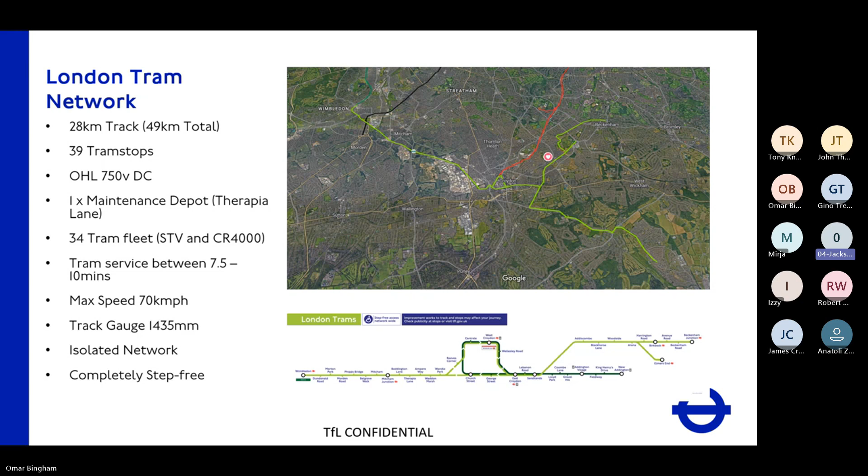And it's completely step-free, something that we're proud of as well, to allow all customers from all different types of physical capabilities to access our trams. We've got low loading floors, and we maintain a good platform clearance for all customers.

Talk a bit about track forms: embedded track, concrete slab, the little of it we do have. So when it comes to embedded track, we have what we call the on-street sections. So this is where part of the track is shared with the highway users, road users, and pedestrians. As you can see, it's an open environment. Anyone can access it, do what they like.

And believe me, we get some scary stories from time to time, but it's the nature of the business that we're in and the environment. That's the whole purpose of trams. It connects little towns, cities, takes people to hospitals and closer to the destination, essentially. So we have on-street track.

We also have segregated track where we don't have the highway entering. So this is kind of a different environment, but we still have pedestrians, as you can see in the photo, wandering, doing what they like, dropping bits of debris, people's vapes in the grooves, and all kinds of stuff. Chicken bones, we've had earphones, fidget spinners, nuts, bolts. This is the environment that we have to work with.

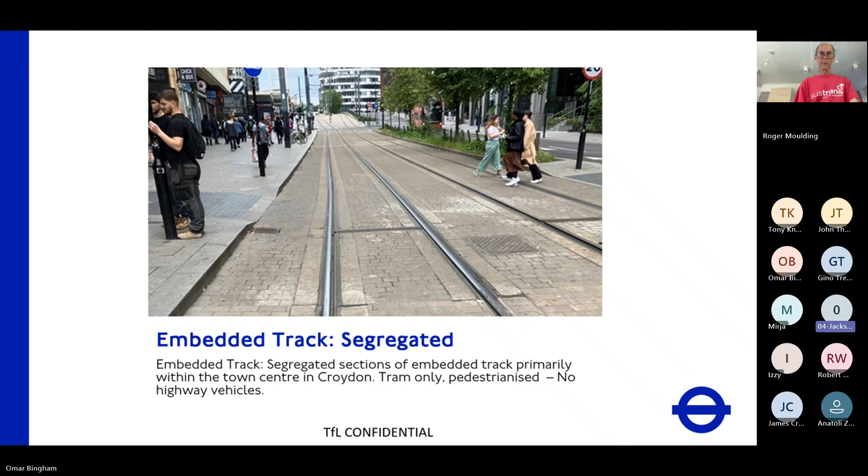We have a very, very small section of concrete slab track. I have to give this some mention. This is at Wimbledon. The purpose of this slab was to raise the track bed to the platform height to get into Wimbledon Station, because the platform to the right is for National Rail, and they've got 750 and 930 platforms there. Ours is slightly shallower. So yeah, that's a small mention of slab track.

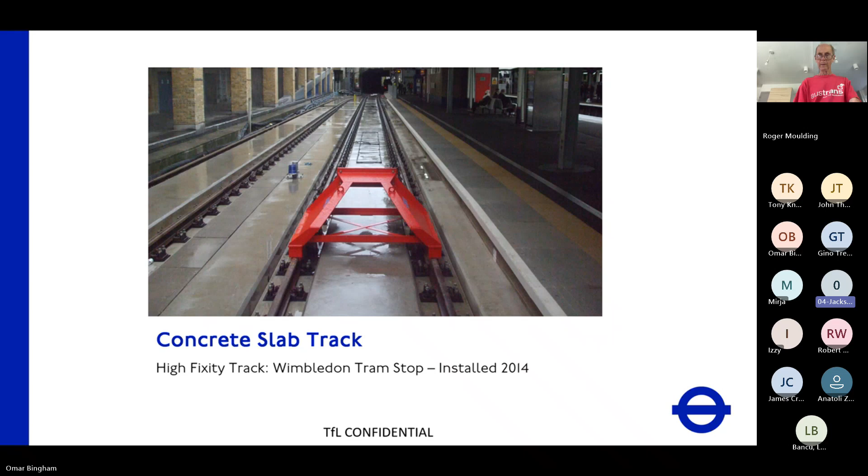Road crossings is another track form that we have. It's slightly different to the embedded in terms of the material that we use to construct it. The slab is slightly different. And so this one is constructed with a flat plate against the flat bottom rail. I'll say a bit about that.

It's not a level crossing, although I tend to say that from time to time. It's a road crossing. It's controlled by traffic signals. Cars stop at red, they go on green. It's as simple as that. It's a line of sight type of network, so it relies heavily on drivers' visibility and them acting and protecting the customers as they see fit.

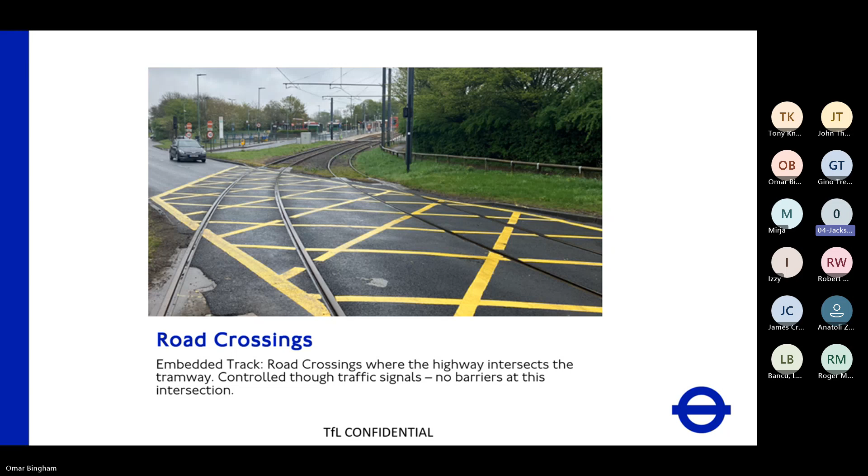We have ballasted track, and again, another misconception is that we have little ballasted track, but in fact, 80% of the network is ballasted track, featuring a mixture of different components, and it's conventional, just like National Rail. We've got wood, composite and concrete, different types of bearers, angular granite ballast, so nothing too different to what you have on your networks.

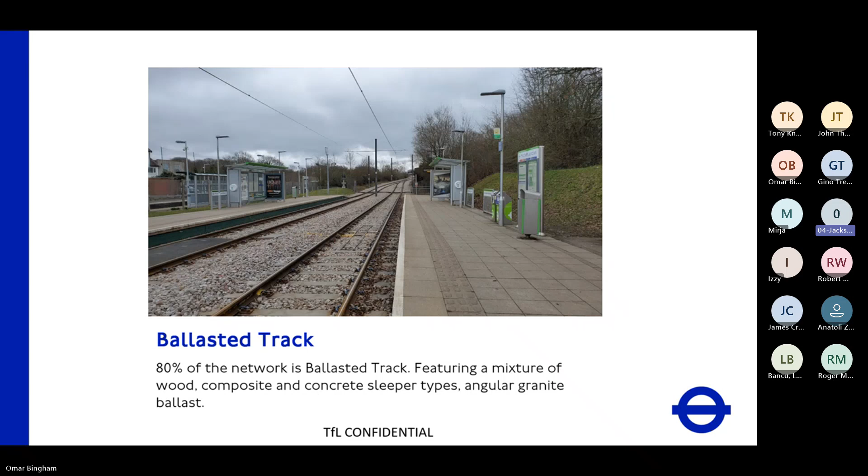I'm going to talk about some tramway features, some of the stuff that makes the tramways quite unique. Interlaced track: this is in between Beddington Lane and Mitcham, where we have a single line occupying the two tracks and one envelope, essentially. I think this was done purely to prolong the life of the single line section. So what we have at either end of that interlaced track is two crossings. That was for one tram to travel on one rail, one tram to travel on another rail.

We're going to be replacing this asset in October. So we are keeping the interlace, but we're making the crossing a little bit wider to allow for maintenance. We're changing it from a 1 in 7 to a 1 in 8 crossing, widening the gap between the two rails so we can get things like welding apparatus on there or fish plates if we need to clamp.

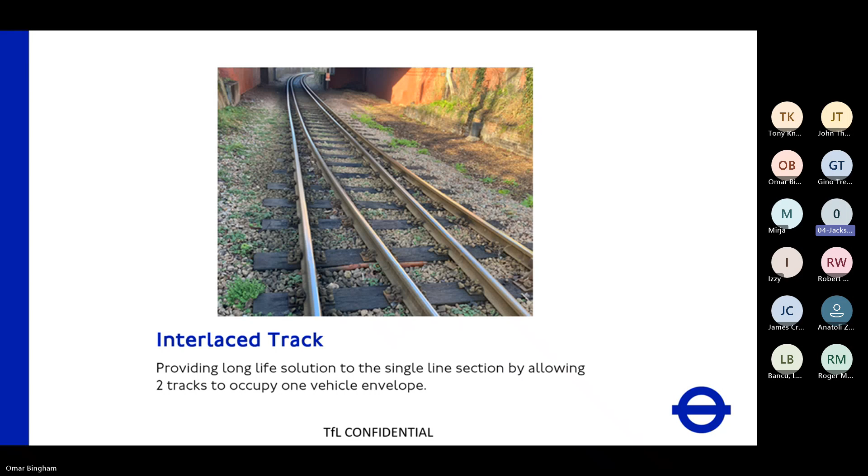We have very tight radius curves. We've got many of these in the town centre in particular, 25-metre radius curves. These are laid, some of them with adverse cant, because we've got to follow the camber of the road. So we experience very high rates of wear here. There's pretty much nothing we can do here. This is inherent. We have to live with it and adapt our maintenance regimes to suit the aggressive wear that we get in this pattern.

The trams navigate these curves quite well. Actually, they can navigate curves up to 18-metre radius curves. They've got very small wheels. They've got independent bogies. And so it's nothing for them to traverse these curves. In the ballasted section, we have up to 30-metre radius, so not so bad.

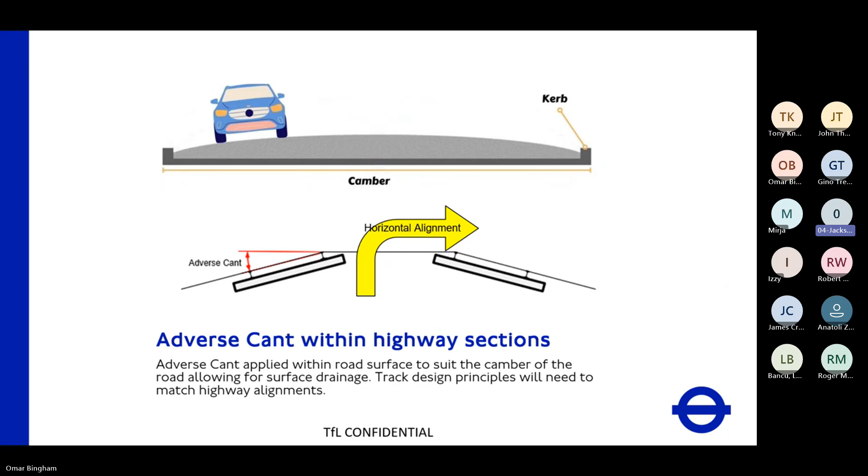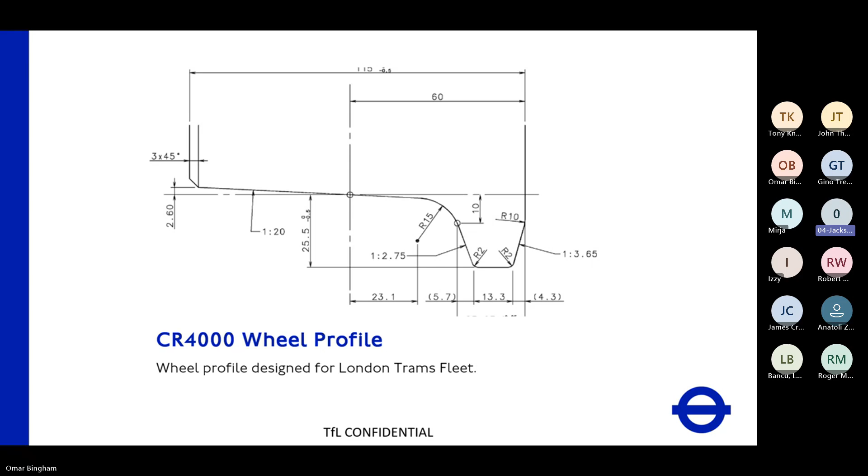We have a different wheel profile. So the wheels are designed for flange running, but we don't have that on the London Tram network, so we don't run on our flanges. But they are designed for that. These are tram wheels. They have a little bit of a longer flange to navigate some of those curves. And it's slightly different to the wheel profiles that you get, sort of a P8 or a P10 on mainline or underground.

We have a back-to-back gauge, which is incredibly tight. So we require vehicles to be at least 1380 back-to-back. That's slightly narrower than the main line because we've got flangeways of 29 mil. So if you go on the main line, your flangeways are 50 mil clearance. This is a huge problem for us for getting RRVs and machines onto track. We have to often take off the check rail or adapt the machine, which incurs quite a lot of cost on us.

Also, our check rails sit 21.5 mil above the running rail when it's new. That also presents challenges for RRVs that have road wheels. They often come into contact and strike the check rail. So it's one of the things and challenges that we have to deal with.

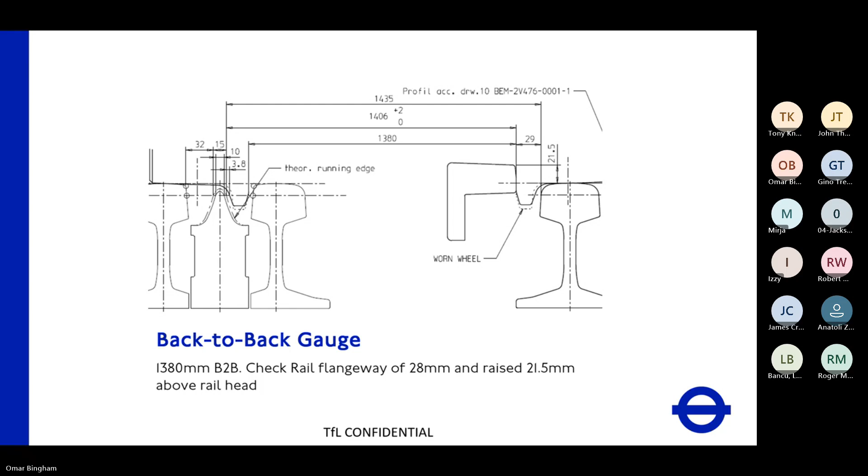A bit about components and our configuration, really. Grooved rail, I'm sure many of you are aware of it, but the profile that we predominantly use is RI59, although we have some 54 elements or some 60 elements in the network. Essentially, this rail was designed to be laid flat because its inclination is built into the head of the rail. So you wouldn't put it on a sleeper with an incline of 1 in 20. Most of the rail is grade 350.

What we're starting to do now in some of our curves, 25-metre radius, is increase that steel quality to 400 GHT, something that the Europeans have been doing. So we've been following suit to do that. So in particular, Barclays curve and at Reeves Corner, we've got 400 GHT through our curves. And they're also through our S&C elements. So the stock rails of the embedded points will have 400 steel built into it.

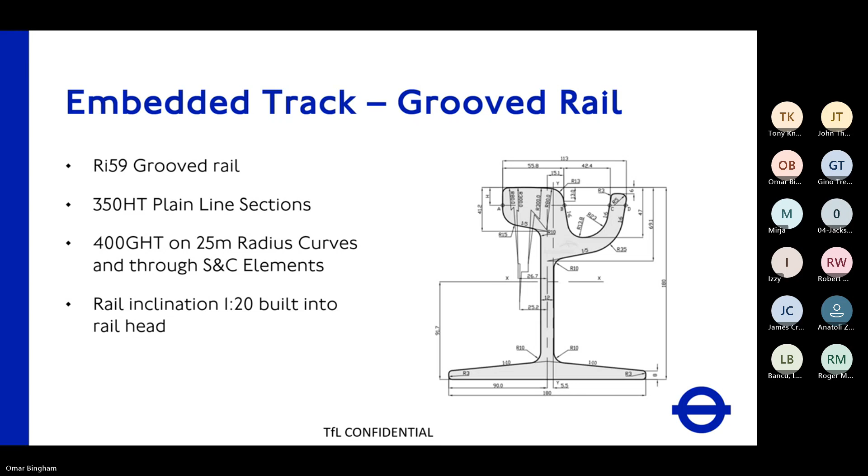This is a typical track bed construction for embedded track. So everything has a slab. It's laid in a nice concrete slab, and the rail sits in a concrete channel, to put it quite simply. Within that channel, we backfill it with a polymer to keep that lateral stability. The rail is gauged to 1435, and over the top of that, we put a wearing course of tarmac. This is how embedded track is laid to allow for the highway.

We allowed a 6 mil tolerance between top of the rail and the wearing course of the road, which often isn't kept because it's difficult to do that. But in any case, this is what we have.

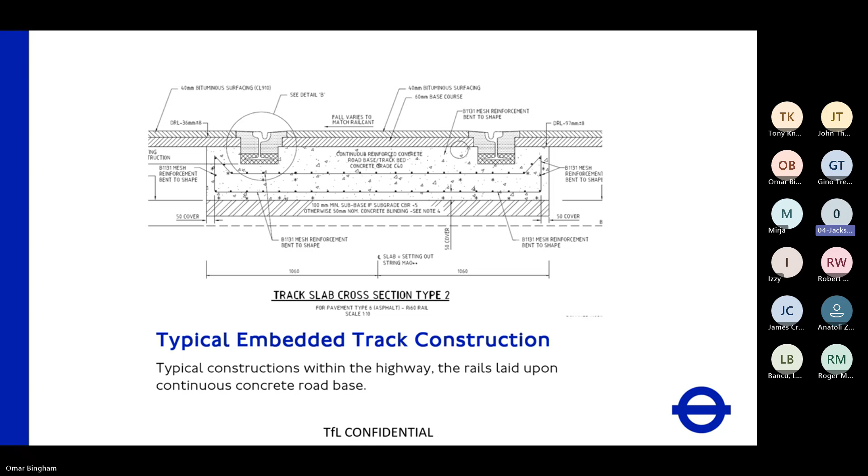For the road crossings, typically, which we're trying to design out, actually we are actually designing out of life now, this design of a flat bottom rail with a bolted keeper. So this flat plate that's bolted to the flat bottom rail. What made the issues here, which I'll talk about later, but essentially, as the road wears away and potholes are formed, we get loading onto the flat plate here, which then in turn breaks the bolts, or snaps the plate, and obstructions affect the flangeway between the rail and the keeper. We have this design in many of the road crossings, which we are phasing out through our renewals program.

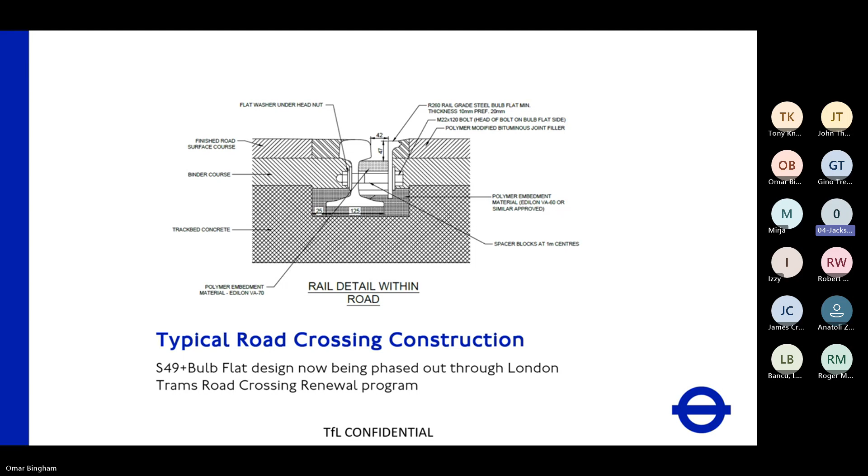Flat bottom rail, traditional, so it's a lot smaller than your 113 pound or your 1060s. We incline it at 1 in 20. It's a smaller, lighter rail. So if you're buying in bulk, if you're buying 30 tons at minimum, it's far cheaper to buy 30 tons of S49 than it would be to buy sort of 113 pound. The whole point of tramways is to keep it cheap, keep the cost down, and so that's what buys in communities really across the world into tramway systems. So we use components to suit that.

There's talk of changing this and going to 113, but I'm not quite there yet. I think there's still some benefit to using this, but because markets that make these components are overseas, and with our issues with Brexit, it's quite difficult to source these. They have very long lead times. However, we are where we are. This is S49 rail. It's got a smaller foot as well, 125.

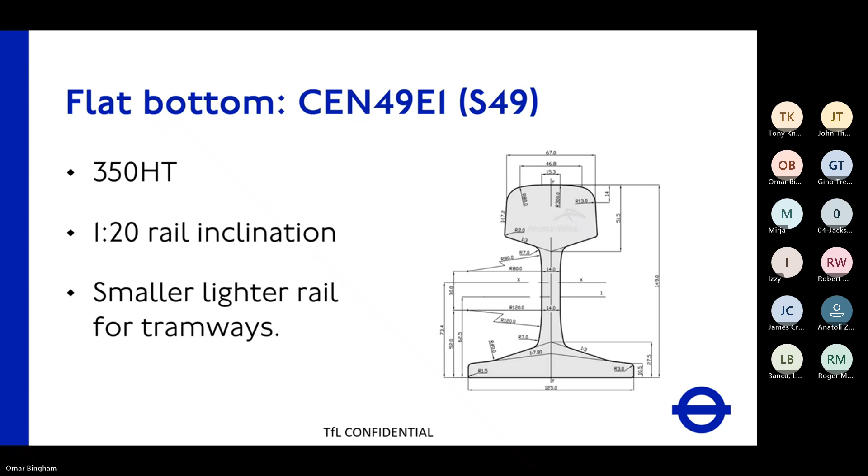Sleepers. So predominantly, we have concrete sleepers throughout the network. We inherited a tarmac T16 sleeper from the constructors of the original tramway system. And we're slowly trying to phase that out to put in, where we can, T-cup composite sleepers. We had some issues last year in Sandilands where we had some temperature variance with the gauge. So as the temperature heated up, we had the track gauge spreading. It wasn't much of an issue, it just wasn't in installation tolerance, but we're going to continue to use and adopt this so we can meet TfL's green strategy. And we find it to be a better sleeper than woods and easier to install than concrete.

Where we do have to install concrete, we are installing the NR1502 designed by Network Rail, and that comes with fast clips, which is a type of fastening that we're trying to move over to rather than the SKL, the screw, simply because it's easier to use, it's better. We do have wood bearers through our S&C layouts, pretty much most of them on the ballasted section, and we've got some long bearers as well within the platform to keep that alignment. It's one of the techniques that we use.

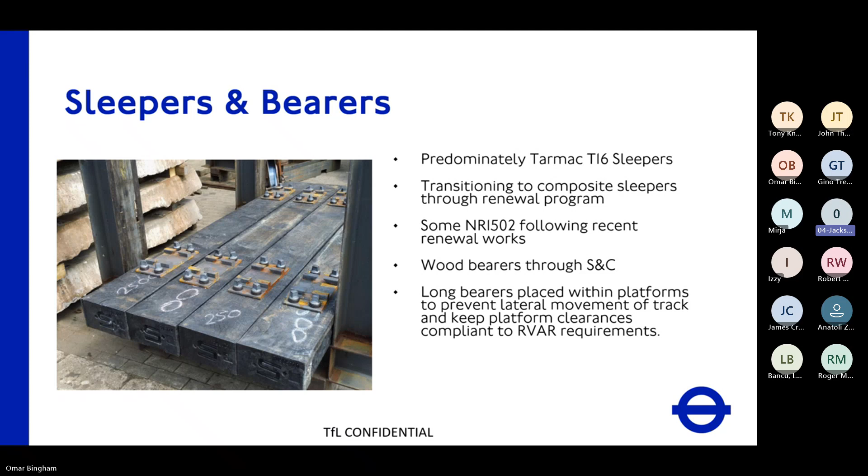Fastenings again, so we're trying to move away from this where we can, move into a fast clip solution. It's nice and easier to use and easier to manage. When you take these screws out and if debris gets in the hole and you over tighten it, you crack the sleeper. And we just find that the fast clip is better. But yeah, it's high toe load all the same.

S&C. So point mechanisms. Now, I'll be honest with you. It's not my area of expertise. I've inherited this as an asset. I've never had to do it before, but I'm learning slowly. I've got a training course later on this year to attend. All of them are manufactured by Hanning and Kahl, and they sit in the ground in a thing called an earth case. So it's in the track bed. It's maintained by the permanent way team, and it's basically got a motor in there, a couple of springs and levers that switches to whatever position. There's different variants as well, because we have motorized, hand swung, throw over types of point systems, but they pretty much all do this.

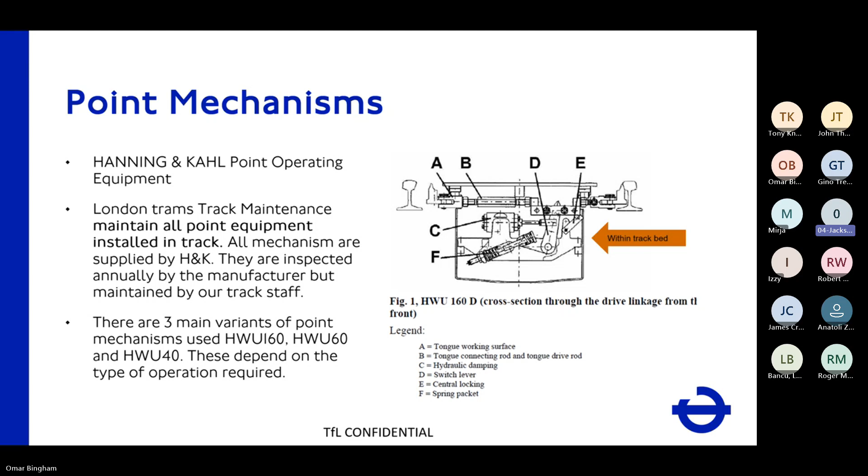Sprung points, again, another type of unique feature, I would say, to the tramway. It's a cheap, cost-effective way to have a set of points that allows you to operate it through different routes. So essentially, sprung points are designed to be pushed through. So we get flange back contact on our points. Some people might find that scary, but this is how these points are designed to be used. Essentially, they return to normal once you push through them.

It requires no inspection after that. And to aid in that movement of the switch, we install something called Roll, which is a dampening device that prevents the switch rail from slamming into the stock and damaging the componentry right there.

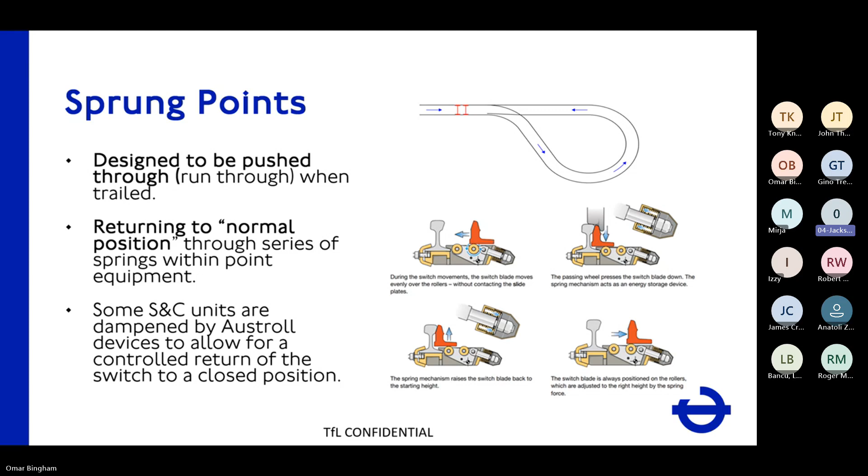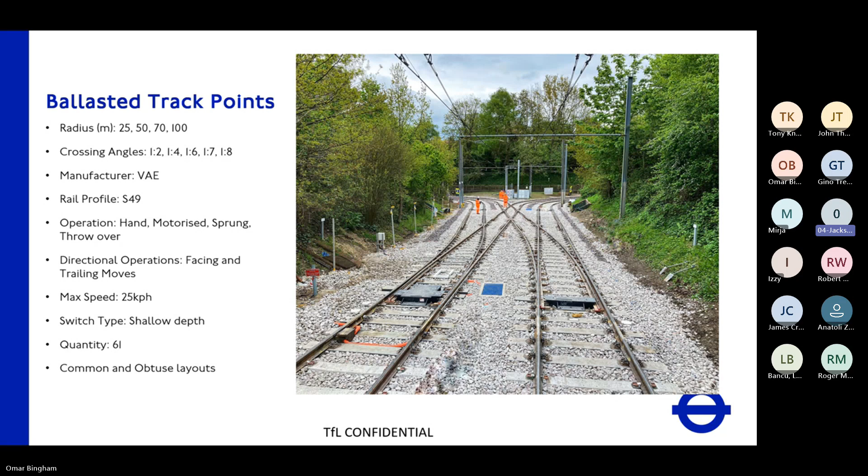Yeah, so S49 shallow depth switches. Again, our lead lengths are really short. This is a 7.8, 7 meters, 800. And we have something called an anti-creep device installed into our switches.

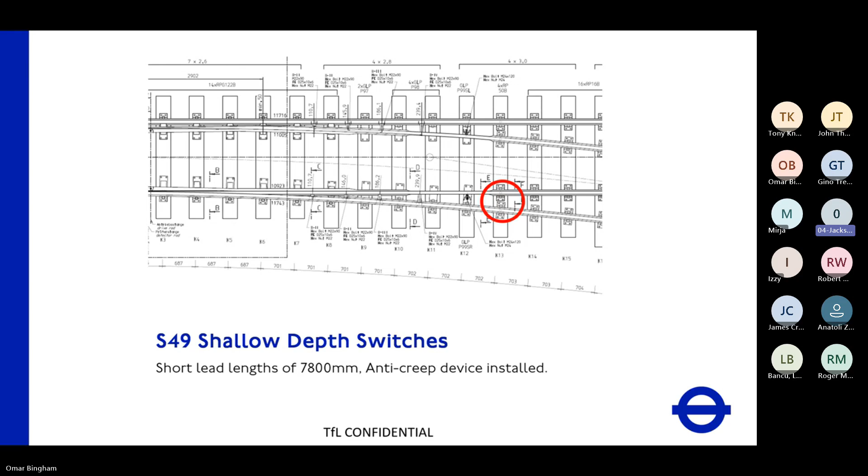So what is that? Basically 2 pins on a base plate, preventing the longitudinal movement. So in the foot of the rail, we drill 2 holes, put the stock rail down, put the first or the last clip secured on the switch, and that prevents that longitudinal movement. So that's how we manage stress in that area. Essentially, these are unstrengthened sets of switches.

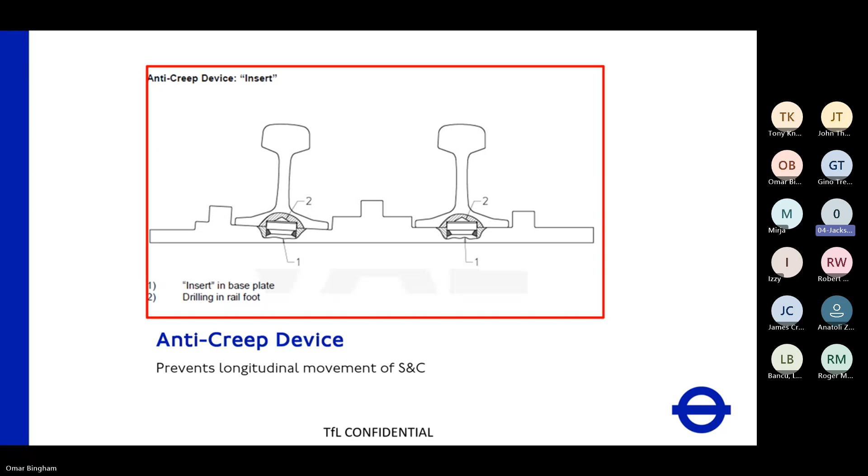Embedded, again, works very similar to the ballasted. We have an H&K, an inspection cabinet, go in there. Same with the motorized, although they're slightly larger, between 50 and 100 meter radius turnouts. The elements of it is 400, so the stock rails are 400, the switch is 350 to allow us to do some weld repairs in those locations. Again, it's a mixture of trailing and facing, and we've got about 15 sets of these.

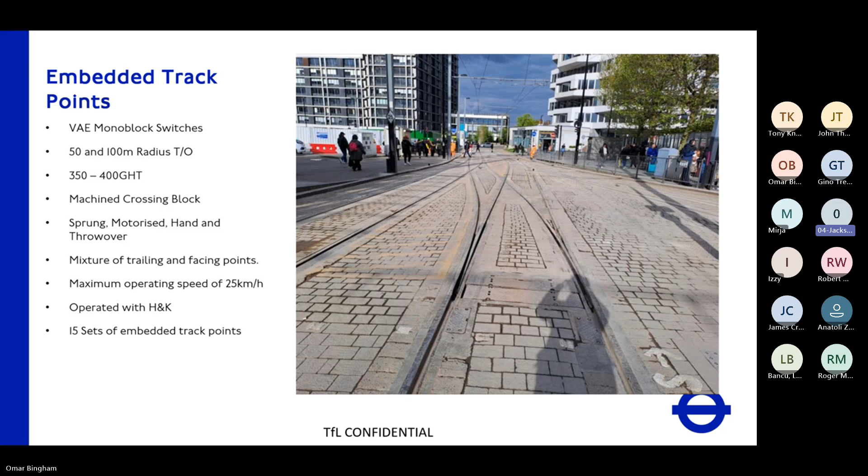The crossing block is made out of one solid block of steel. So when I went over to Germany, they had a massive block of steel. So it's not hollow as sort of ballasted crossings are. They just machine it, and that prevents it from snapping and breaking. You don't have crossings breaking. So it weighs about a ton. But this is what it looks like.

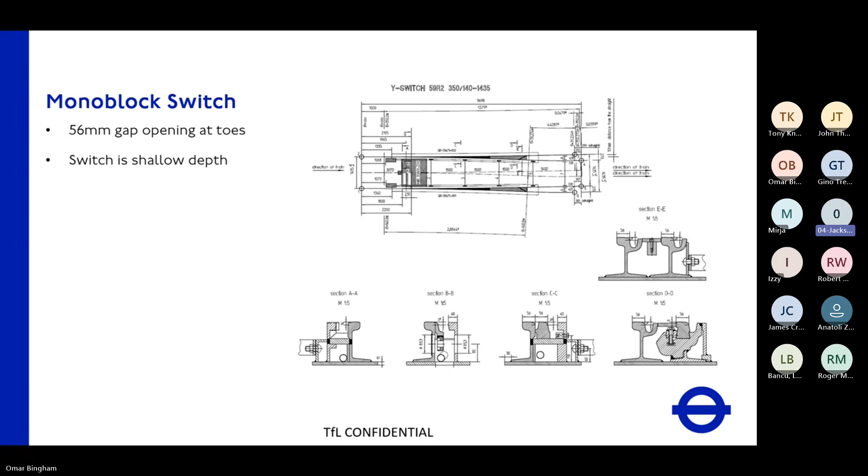So the switch rail itself, probably about 80 mil in depth. It sits on a plate, a flat plate, slides along that plate. They call it a monoblock switch, and I'll show you in the next picture because basically they weld this block onto a bit of rail, and you've got in your head like a picture of a swing nose crossing. It pretty much works like that. It's all shallow depth all the way through until it's welded at the other end.

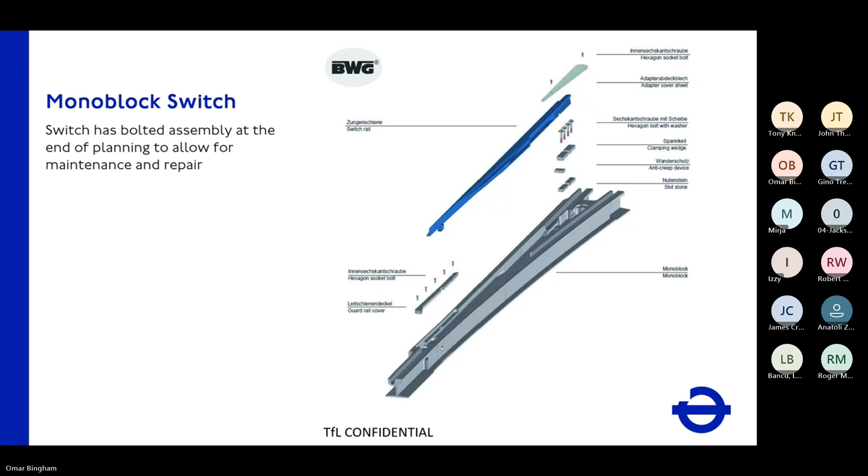Lubrication on the network, so we do have them. We just don't have them within the embedded sections because the grease takes the contaminants, and that's a whole other story, and a whole other presentation on that. Essentially, we have lubrication in our ballasted section, friction modifiers. We're using the very old LB Foster GDUs. It works for us. We've looked at other designs, newer designs in this century.

It's probably not going to work for us because of the size of our rail. This works fine, and we're happy with it at the moment, and the grease that we're using as well. I had this gauge designed as well by LB Foster. Asked them to produce a gauge for us, do a study on our wheel profiles, rail profiles, because previously our teams were going out and adjusting this manually. So now we have a gauge, and hopefully that can help with the number of noise complaints we have on the network.

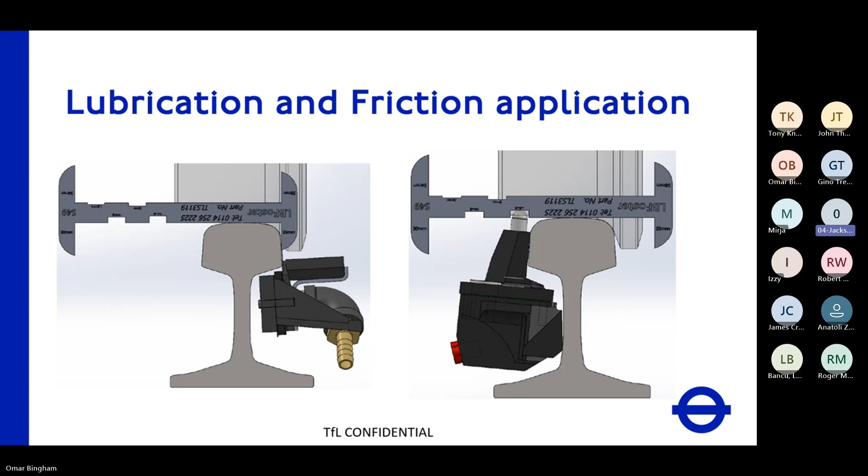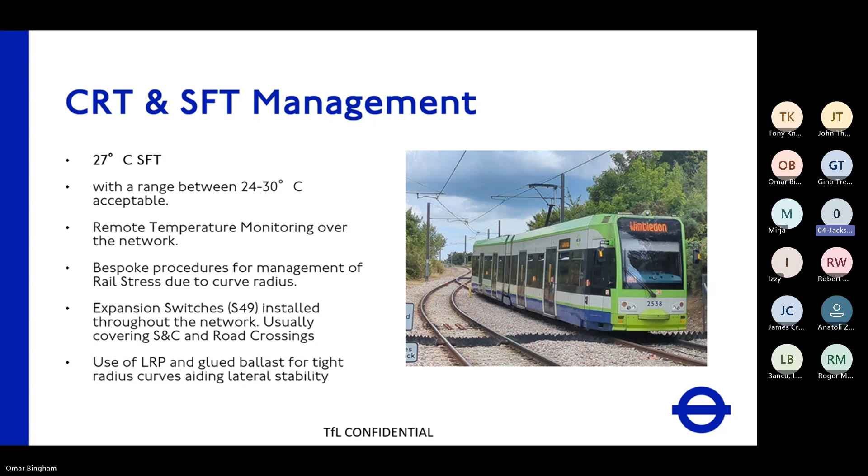We have remote temperature monitoring as well. So that's always live on pretty much all of our network. So we're always keeping an eye on temperature. We also have expansion switches, adjustment switches around the network to allow for that thermal expansion. And we make good use of LRPs and glued ballast, pretty much in every renewal, just to keep those alignments for us within the curve, especially in those tight radius curves.

We do carry out a geometry inspection. So a team comes out to London Trams. They fit one of our trams with lasers, cameras, you name it, everything, laptops. The tram runs around the network, does all of the dynamic recording. It also points a laser at the rail so we can look at the rail profile, see how much of the rail is worn. Really good stuff, 4K quality videos. It also measures the overhead line and any passing structures and clearances as well.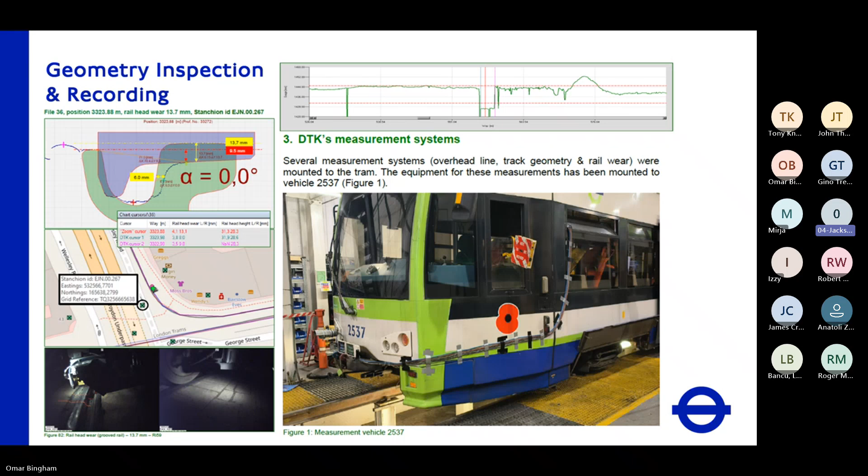And we're working with the company DTK to look at how we are going to manage representing our track quality index, so to speak, CCQ charts and stuff like that. So we've got further work with DTK, but the data that we get from them is phenomenal, to be honest with you. We also have rail inspection and testing, so this is done on an annual basis too. Ultrasonically, we do that with pedestrian testing. Someone goes out and measures the rail. For rail profile measurement, that's done through another machine, and that produces for us loads of MiniProf profiles, which is helpful for annual planning.

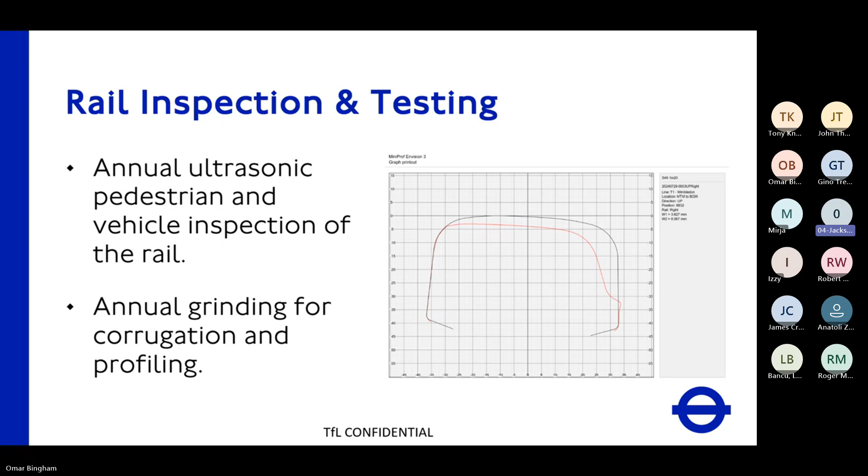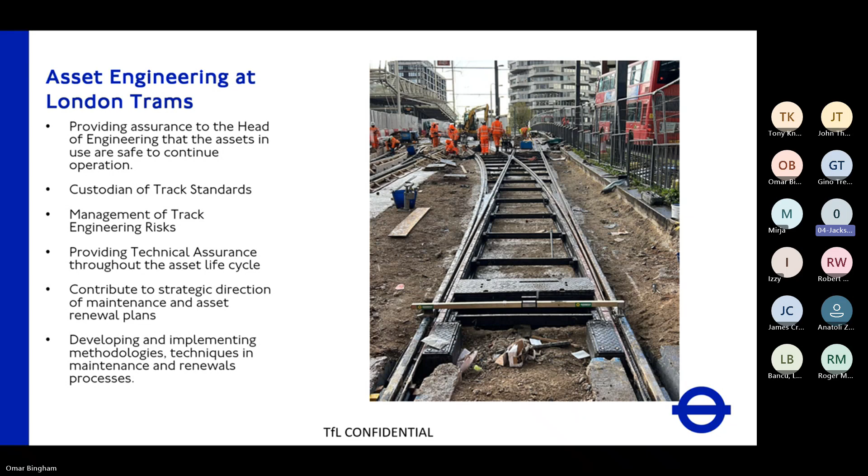Trams is unique. It's a fluid environment. And again, it's a lovely place to work as an engineer because everything's innovative, everything's new all the time. We don't have to stick to a regimented system.

Light rail is becoming something that more cities want to implement because it's a greener, safer way to travel. So lots of countries are doing it. Even in the UAE, I've been speaking to some of the engineers out there and in Qatar, where they are spending lots of money on building these transport systems around their cities without having to spend so much money on tunnels and viaducts, bridges, etc.

So some of the key challenges I'm going to go through at London Trams quickly. So I've got 8, but I'll go through them very quickly. Everyone has this. We've got an aging infrastructure. From when it was built, even before then, I've got 1950s rail in some of my sections. And so we need to invest in our infrastructure because it is aging, it's tiring.

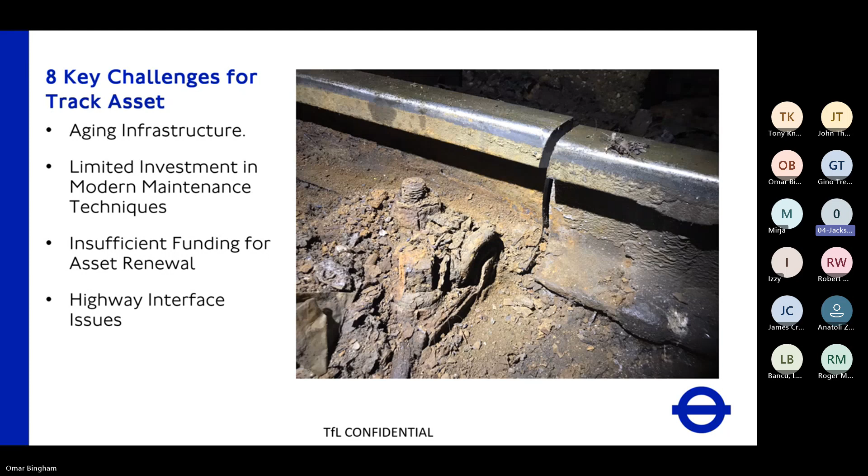Highway interface issues, as I've discussed here, stuff in the grooves, wheel damage is a big issue for us at the moment. Just even getting access to go out on track to change rail, difficult. You've got to liaise with the council, highways agency, get road blockage, put on buses, diversions, signs. It's not easy. It's not just about getting in there and changing the asset. It's planning to do.

Track access for on-track plant. This is becoming a major issue for us because we haven't done tamping properly on the network in a few years. Schweerbau retired one of their light rail tampers, which has meant that we had to go out to market to look at other tampers and other options. And it's very difficult to get access for us on track. Train it in, and it's costly. We're an isolated network. We're not connected to anything on the main line, so challenges are even greater for us.

Again, complex design elements of the geometry, the bespoke componentry and the availability, very difficult. Again, having to go out to Europe or even further to get some components to bring back in the UK and clearing through customs, very difficult. Specifically with BAE, we want to get a van over here to do our maintenance for embedded points. It's very difficult to get through customs with a van full of tools and gear. We had to cancel that.

And lastly, limited supply of constructors out there. There's only one guy in the game for us in London. Unfortunately, I'm not going to mention their name, but the competition isn't there, which means that innovation isn't there. Same people doing the same jobs, making the same mistakes. We want a bit of competition in this market.

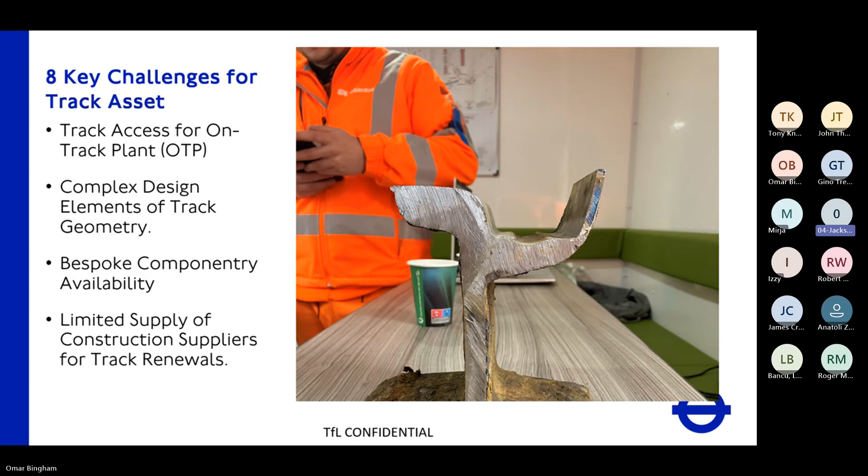And because we're in the southeast of England, all of the light rail systems in the UK are up north: Birmingham, Nottingham, Manchester, Edinburgh Trams. They're getting the best guys, the guys that live in those areas, and we're getting what we have, what's available. We have to compete in a sense.

I do want to touch on rail wear, which is also a problem for us in embedded track. So in the town centre, we've experienced in the last couple of years several sites with high rates of wear. This is obviously due to the inherent design of the geometry. There's nothing I can do to change the alignment. We have to follow the highway alignments.

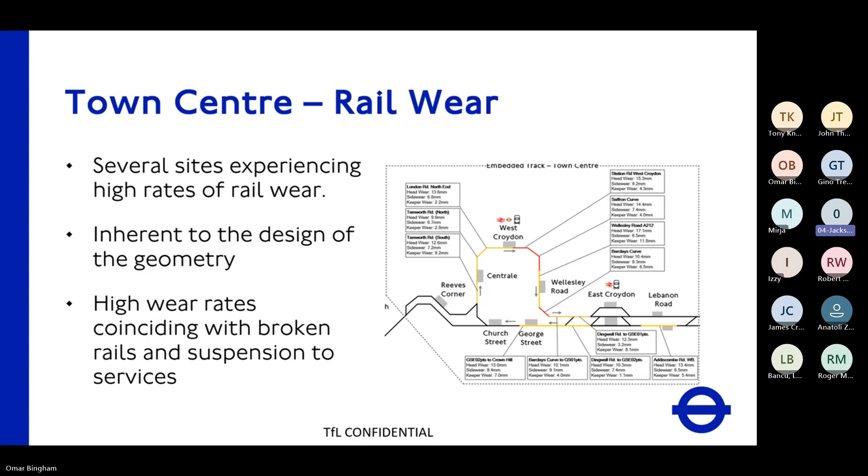But also, we haven't invested enough in our renewals or changed the strategy of doing one embedded track renewal a year, which was something that I've been trying to get the business to understand, that we need to do more than one renewal a year to keep up with the pace of deterioration of the assets.

And so the root causes: track tonnage, specifically in the town centre, because it's the busiest area of the network, loads of people getting on, getting off, getting into East Croydon Station. The trams are heavier, they're going over the tightest curves in the network, not at any great speed, but we've got high cant deficiency curves, and it's eating the life out of our rail as we speak.

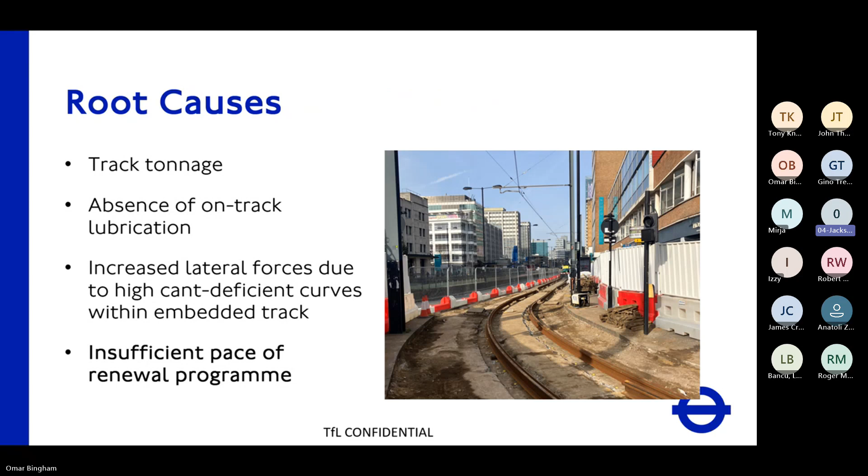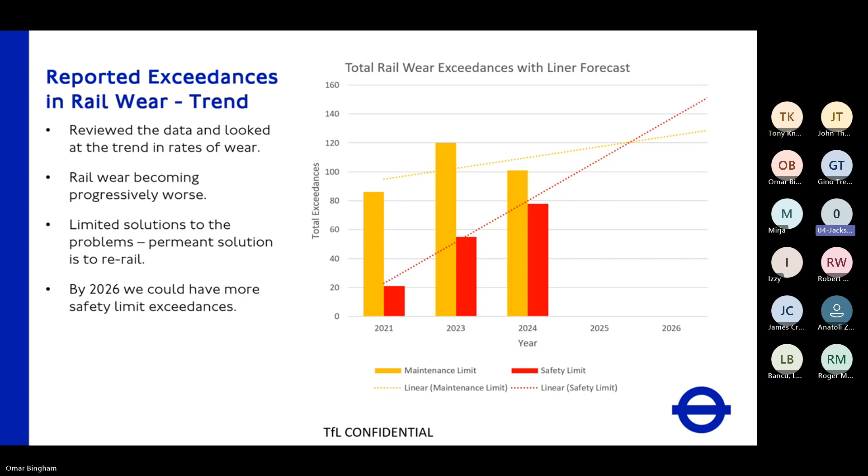And if we want to achieve the goal by 2030 to have a new fleet of trams, this is not the direction that we have to go. The only solution to rail wear in the town centre is to replace it. That's the only solution for us. The broken and damaged rail.

So we are also seeing a rise in reported broken and damaged rails over the years, and the number of interventions that we've had to do: stopping the track, closing the service, going in, breaking out the slab to re-rail, putting in temporary speed restrictions. These incidents are rising, these service disruptions are getting greater. So when we put this argument to City Hall, they gladly gave us the funding.

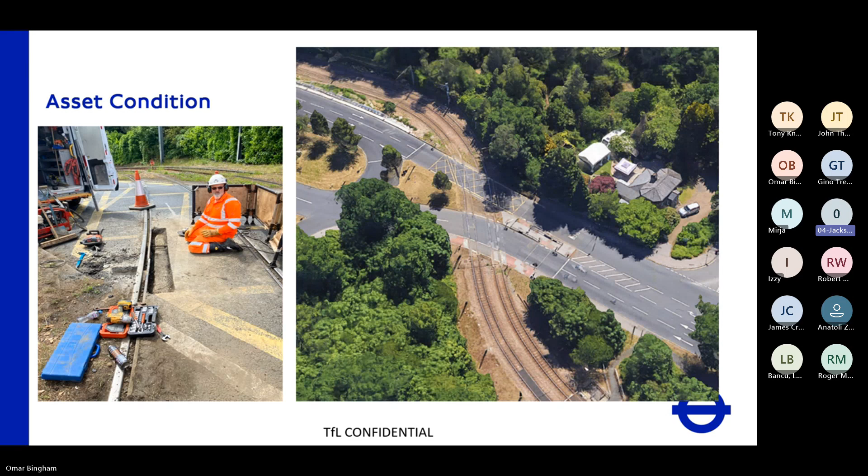This is a very long, hard, difficult task to do. We've got to shut the road, we've got to get cones out, break out the track. This has cost us a lot in maintenance, and we want to move away from this bolted keeper arrangement. The solution is to put grooved rail, which would be great, but unfortunately in this location, you see that it doesn't really work out for us.

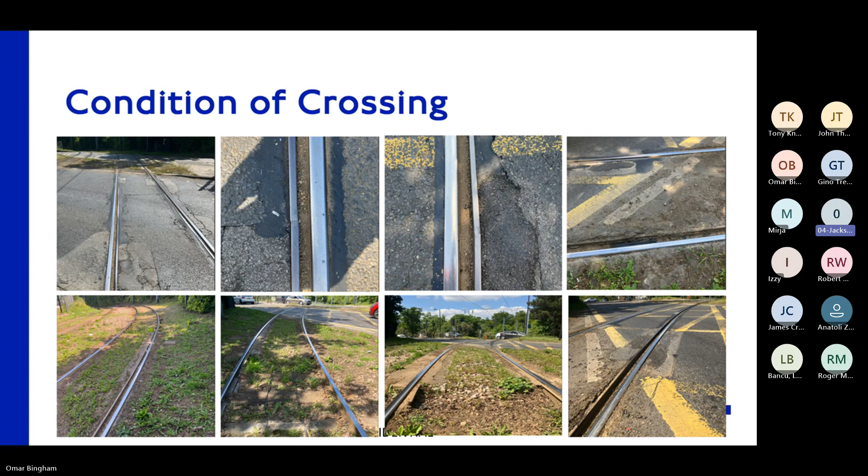So this is the condition of the road crossing before the renewal. So we've got potholes everywhere, we've got clogged ballast, we've got stuff in the flangeway, we've got rubbing of the surface of the flange against the bulb flat there. And these are some of the issues that we wanted to take out.

Again, just to remind you, typical layout of the road crossing, where we've got the flat bottom rail, the bulb flat bolted with a tie bar connecting those two, and a flat concrete base there.

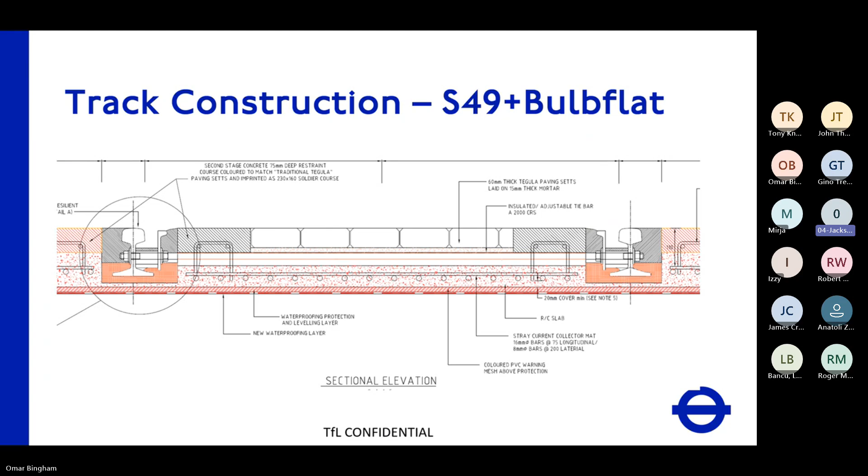So the idea was to initially use transition rails, but a report from Manchester in 2006 essentially said that we should steer away from using transition rails within a curve, but also consider where you put the transition rail between track fixities. You're going from a ballasted section to a hard fixed, high fixity track section, and where you have that transition rail, it's likely to have rail breaks.

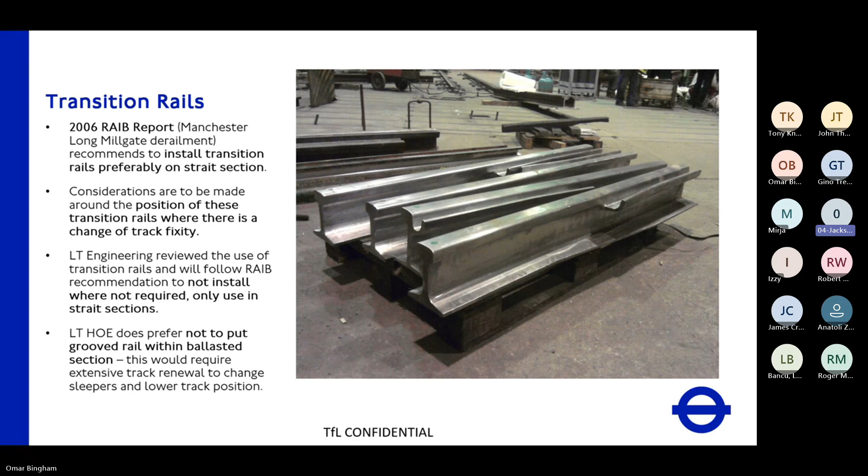So at London Trams, we reviewed it. We agree with the recommendations from RAIB, and to put it simply, we don't want transition rails in curves, and we definitely don't want them where we have a change in track fixity.

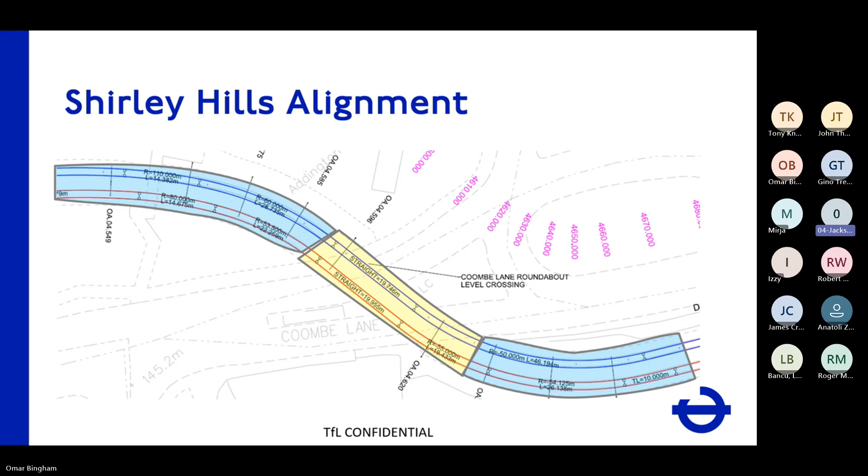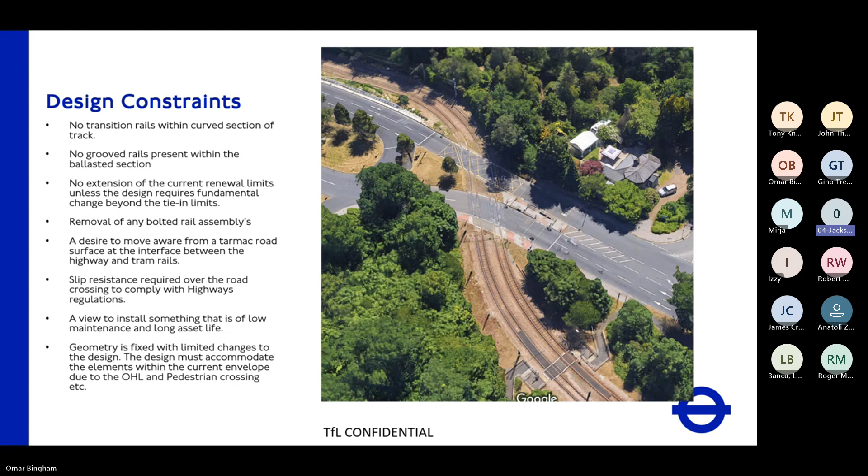Here are some of our constraints. We don't want any transition rails in the curve section of the track. We don't want any grooved rails present in the ballasted section. The reason why we don't want that is we don't want to extend the renewal, but also putting the grooved rail means I've got to change all the sleepers, dig out the ballast, do basically a whole track renewal just to put a road crossing in. We want something that was anti-skid, low maintenance, and we want to move away from essentially using transition rails.

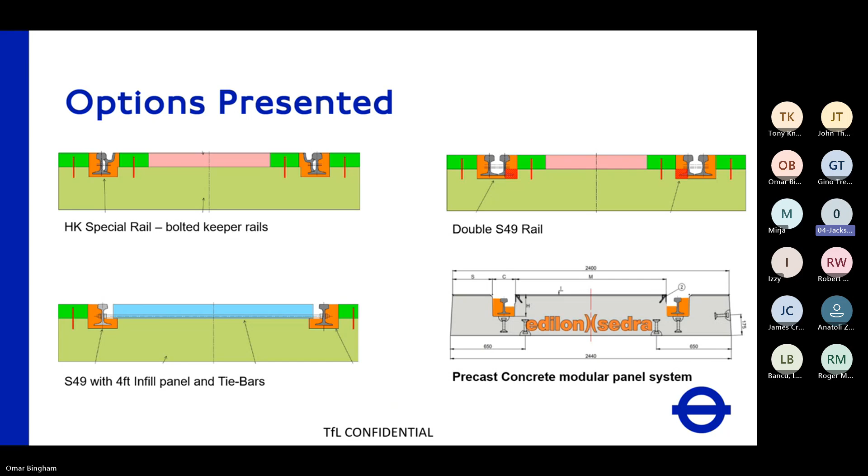This idea, we were almost close to accepting this one, but unfortunately, it would mean another bespoke feature for us, which we're trying to stay clear of as well. So we ended up with the precast concrete modular solution provided by edilon sedra. That allows no transition rails. We get to keep our rails, the anti-slip surface, and protection for our flanges as well.

This is what it looks like. This is the factory in Cornwall, went out there. This is one of the slabs that was out. It met the skid resistance. It's got an asset life of more than 40 years. No requirement for transition rails. We don't have to maintain the road surface, so maintenance costs come down tremendously. Flangeway clearance of up to 69 mil. And it's a precast concrete slab solution. What can you not like about that? And it provides drainage.

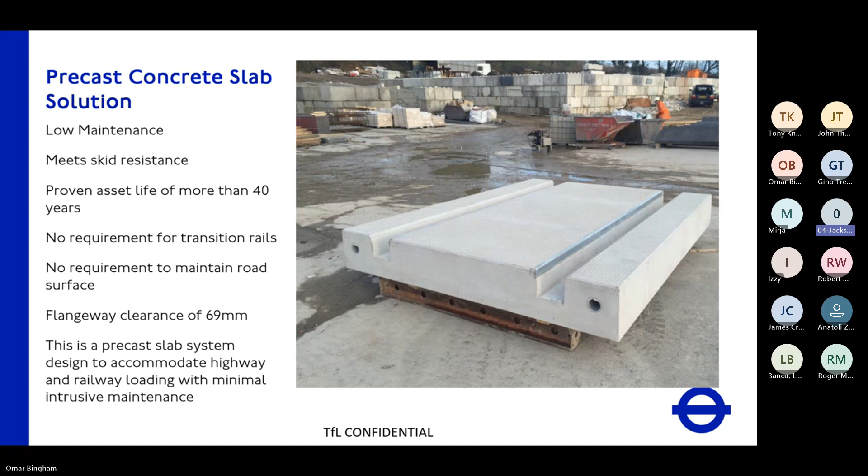The design of some of the slabs are not completely straight because it's a curved section. So they're curved in all directions, essentially. This is the design drawing. So it's about 24, 28 slabs over the road crossing. Everything in purple is the drainage that we designed as well to allow the water to flow off, essentially go into these French drains, go into a linear soakaway to the south, and to the north goes into a massive catch pit at the top there.

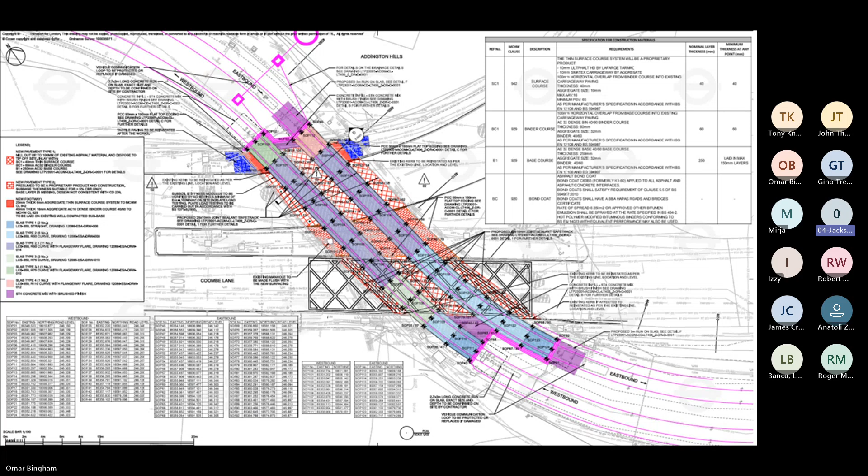We also did some design around the road crossing for the pedestrians. We've had an island feature here as well, but it's completely transformed the neighborhood and the area, actually giving it a bit more of a prestigious look.

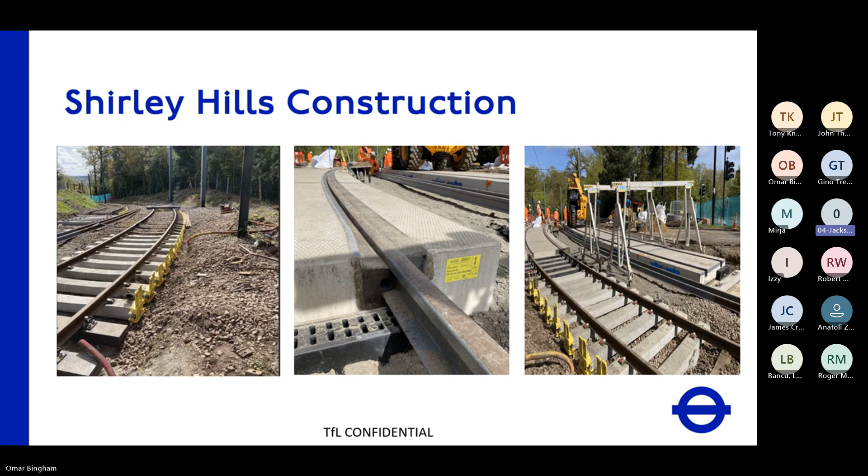This is during construction. Again, I'm a fan of lerps, as you can see. What I don't want is any movement before the crossing round where we have the rail encased in the polymer, because long term, I don't want that to tear away and material and debris get in there. So putting some lerps. This is the transition slab where we have composite sleepers coming off the end of the transition slab and straight into concretes where we're using the 1502s, as I've discussed.

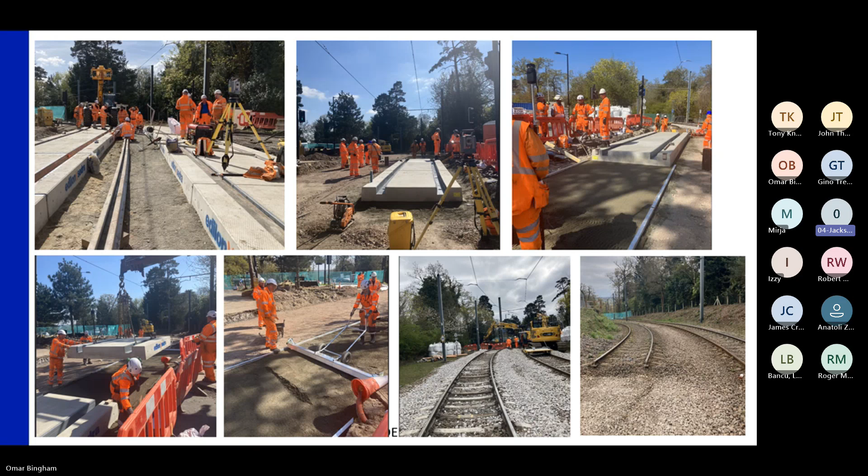Here is setting the slabs down on the screed. Again, it's adverse cant. So as the track comes out of the curve and into the road crossing, it goes adverse because it's a crown of a hill going over the top. So very difficult to design. I wouldn't want to be the designer of this, but thank you. Yeah, we did some ballasting around the ballasted sections, just some reballasting and some ballast gluing.

I did have a SharePoint link. All right. You can still see my screen.

So I just want to show you what it looks like when we're all done. Yeah, so that's the road, now fully relayed. One of the first cars over the road. All the markings.

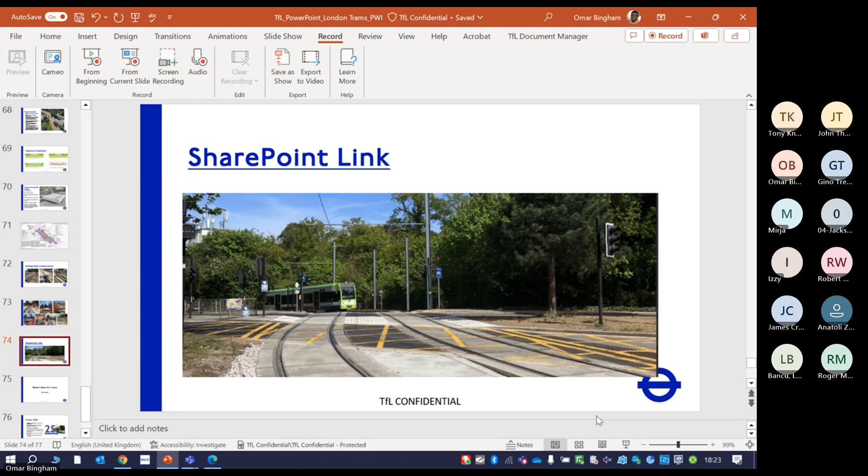So what's next for London Trams? The future of trams is positive. So by 2030, hopefully we will have a new fleet of tram vehicles. They're going to be heavier. They're going to have more equipment. They're going to be bigger. There's going to be more of them. The 24 fleet of CR4000s are going. They're coming to the end of their life, hanging on by their last threads.

We're going to add another siding at the Therapia Lane depot to accommodate the larger fleet that we're going to now have. So we have already engaged with suppliers on the S&C and the materials around that. And I think the tender's already gone out for the trams itself. We're hoping to get an on-track recording so that can aid us in permanent way in measurement of geometry, so it's live. Hopefully that still fits within the budget.

We're going to get a new depot control room, which is already 50% built. It's halfway there. And we're going to be continuing to upgrade our infrastructure. I'm going to continue to deliver on this promise to change the strategy of renewals, to do at least 2 of every asset class well past 2030. There is no talk of any extensions at the moment, so I wouldn't indulge in those conversations, but if it comes, we'll be happy to take on board any of those discussions.